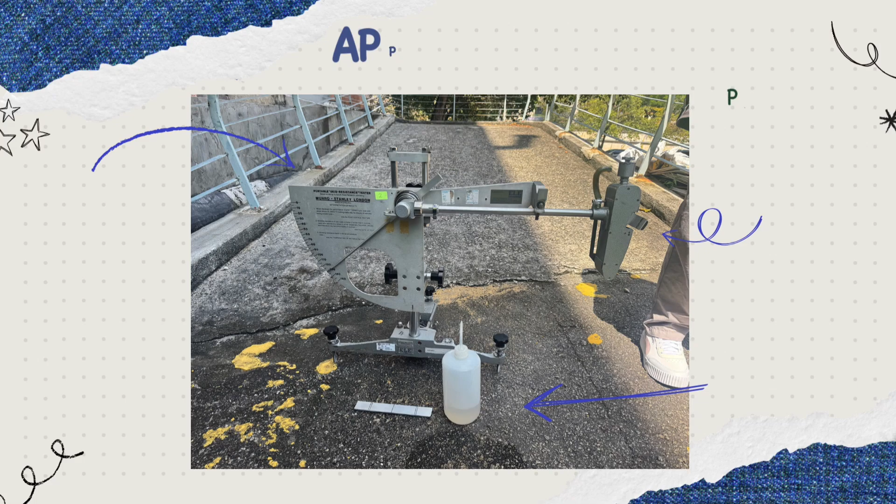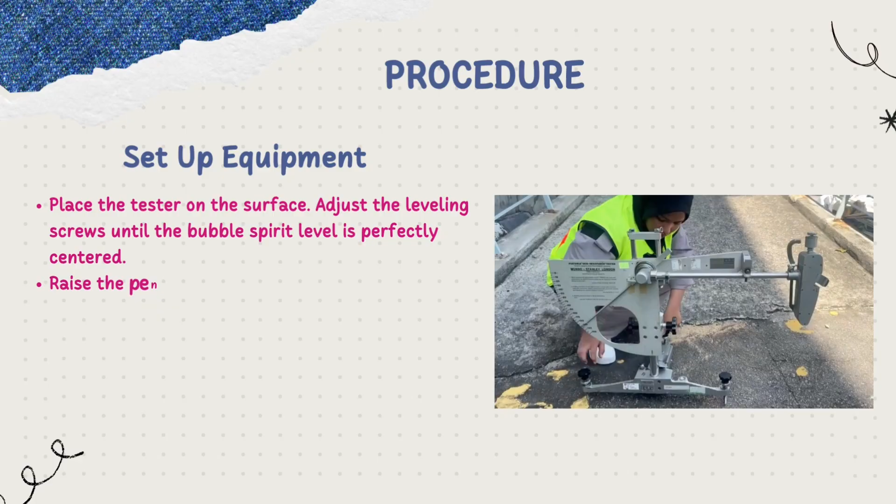Set up equipment. Place the tester on the surface. Adjust the leveling screw until the bubble spirit level is perfectly centered. Then raise the pendulum arm to the horizontal lock position.

Release the arm without it touching the ground. The pointer should swing to 0. If not, adjust the friction ring until it registers 0.

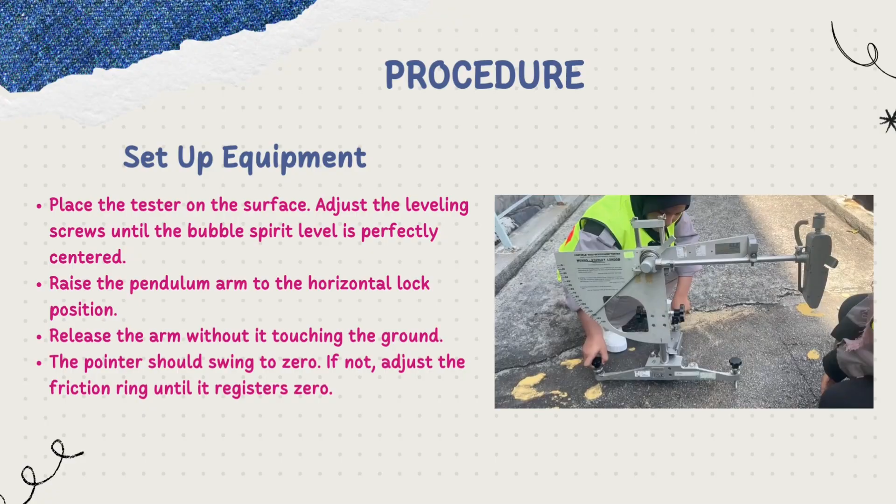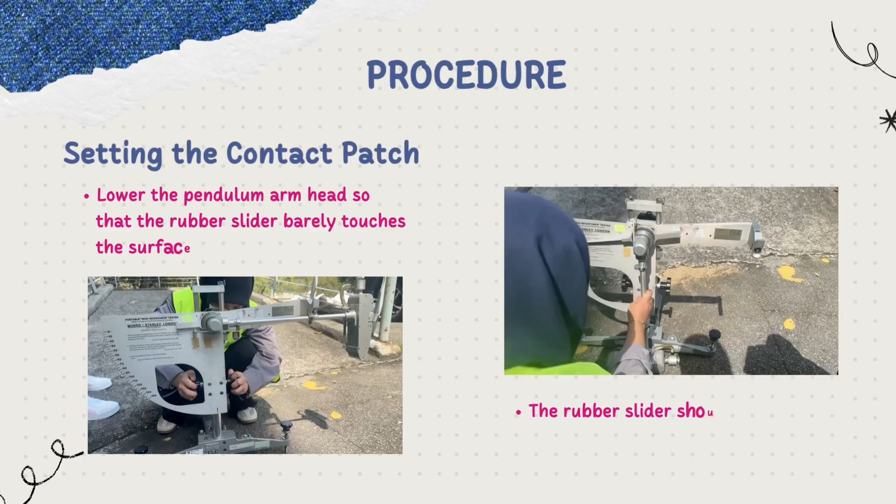Setting the contact patch. Lower the pendulum arm head so that the rubber slider barely touches the surface. The rubber slider should remain in contact with the surface.

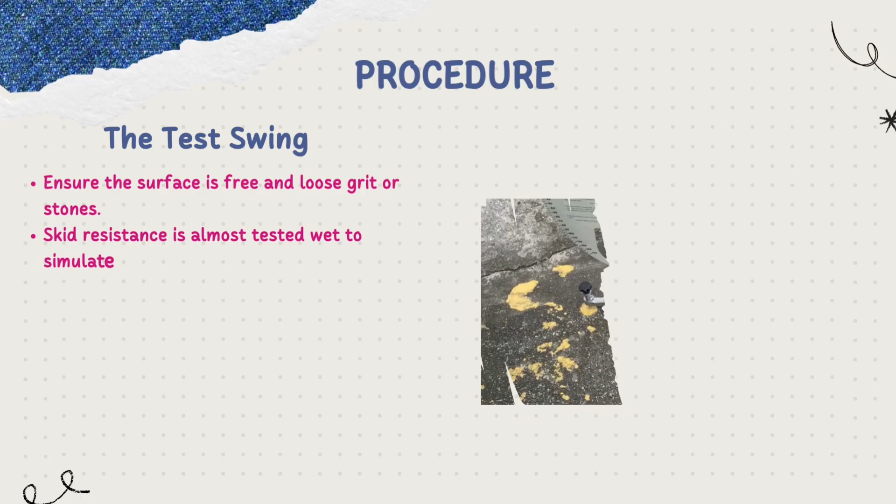The test swing. Ensure the surface is free of loose grit or stone. Skid resistance is always tested wet, to simulate the worst case scenario. Spray the contact area and the rubber slider with clean water.

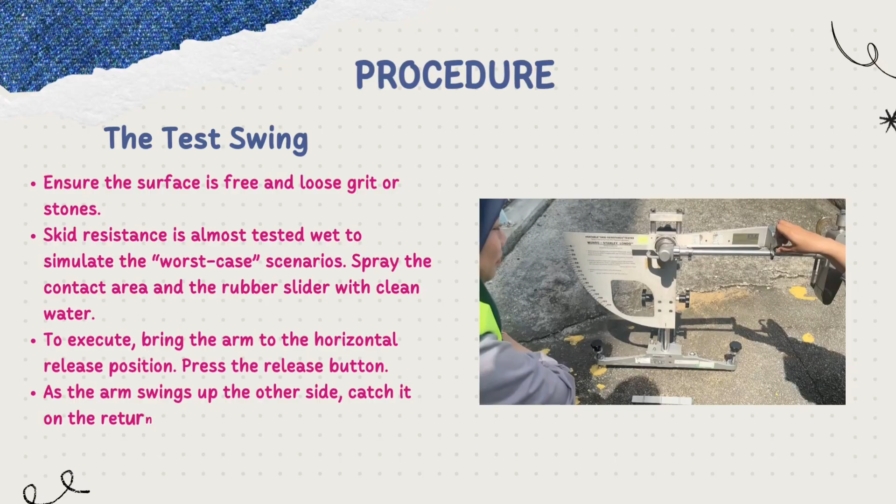To execute, bring the arm to the horizontal release position. Press the release button. As the arm swings up to the other side, catch it on the return to prevent it from striking the surface again.

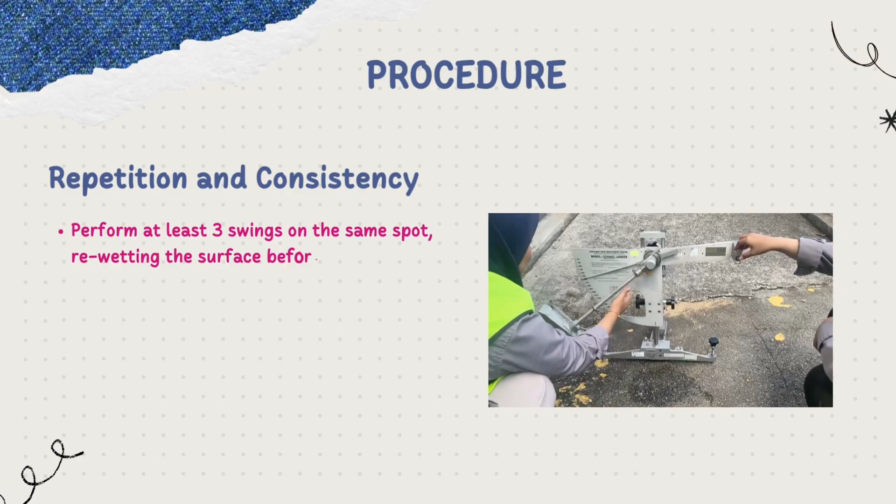Repetition and consistency. Perform at least 3 swings on the same spot, rewetting the surface before every single swing. The readings should be consistent. If they vary widely, check for debris or instrument leveling issues. Calculate the mean of the 3 readings.

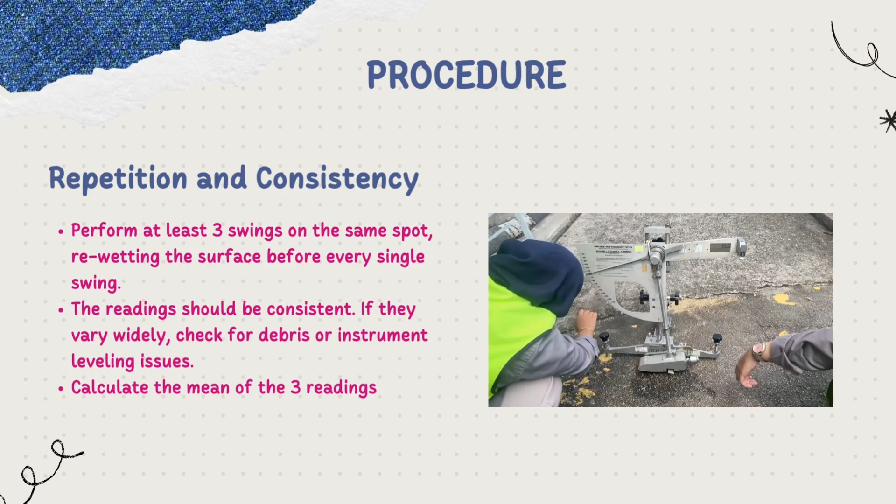For the discussion, a dry condition recorded a mean BPN of 50, which was used to calculate a skid number of 38 at 0 speed and 29.45 at 60 km per hour.

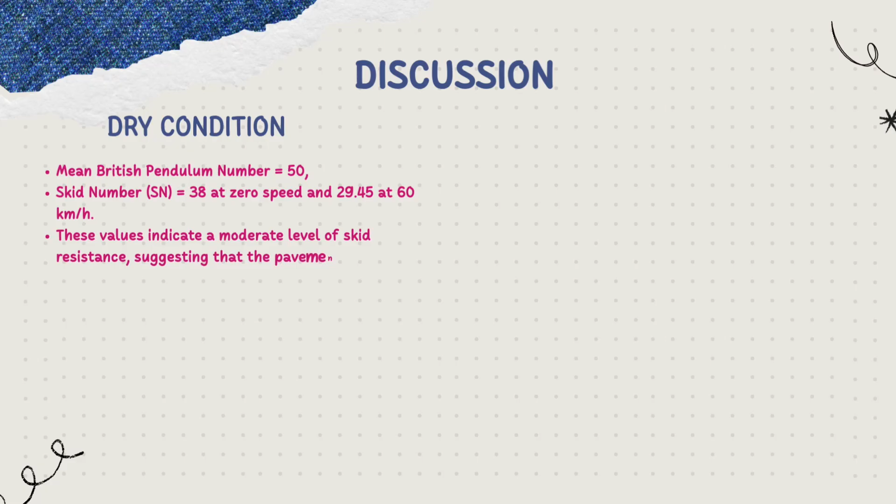These values indicate a moderate level of skid resistance, suggesting that the pavement provides adequate tire grip under dry conditions. However, the reduction in SN at higher speed demonstrates that skid resistance decreased as vehicle speed increased due to reduced tire pavement contact efficiency.

The wet condition recorded a higher mean BPN of 53.33, resulting in a skid number of 42.60 at 0 speed and 33 at 60 km per hour.

The higher BPN and SN values indicate better skid resistance compared to the dry condition, suggesting that the pavement surface maintains good friction even when wet.

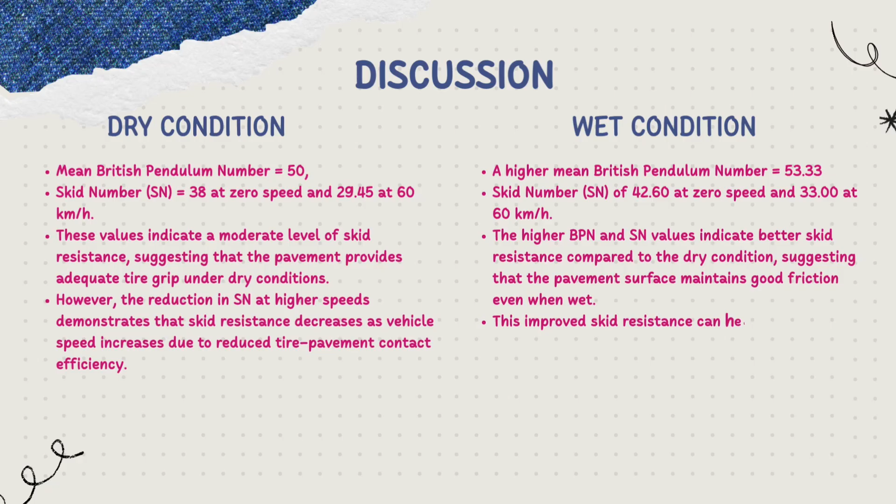This improved skid resistance can help reduce the risk of vehicle skidding and enhance driving safety, although the SN still decreases with increasing speed. The difference may be influenced by experimental factors such as surface condition, equipment variability, or limited sample size.

In practice, dry surfaces generally provide higher skid resistance than wet surfaces. Therefore, additional testing with more repetitions is recommended to improve the reliability of the result.

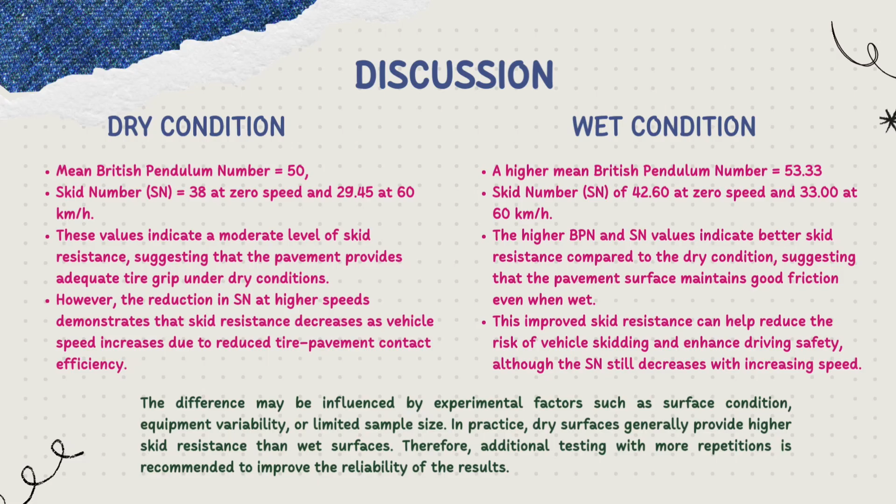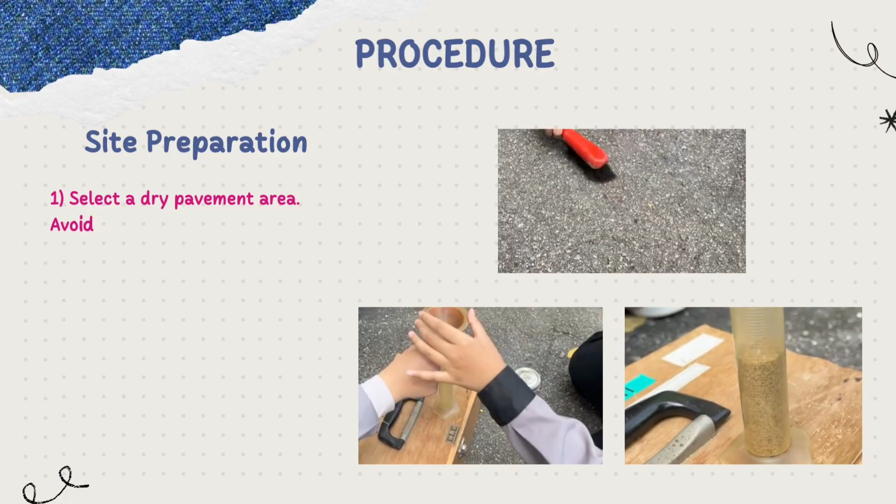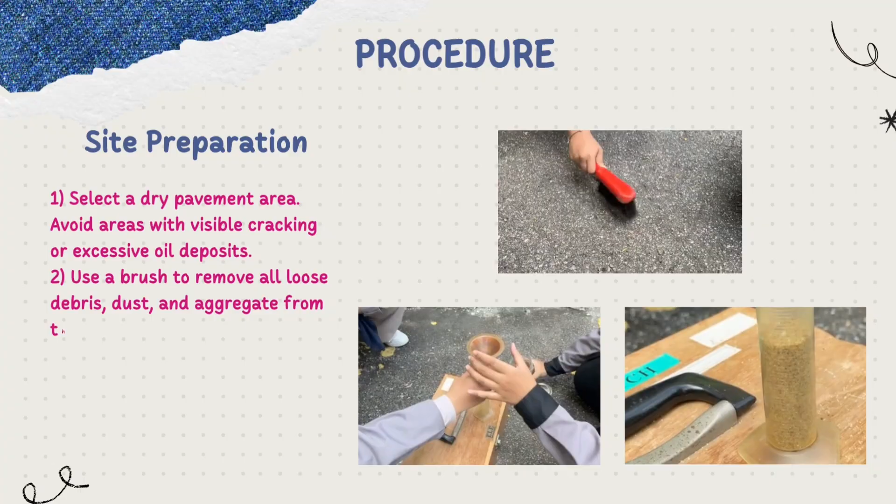Firstly, select a dry pavement area, avoiding areas with visible cracking. Then use a brush to remove all loose debris, dust, and aggregate from the test area. The void must be clear to receive the sand.

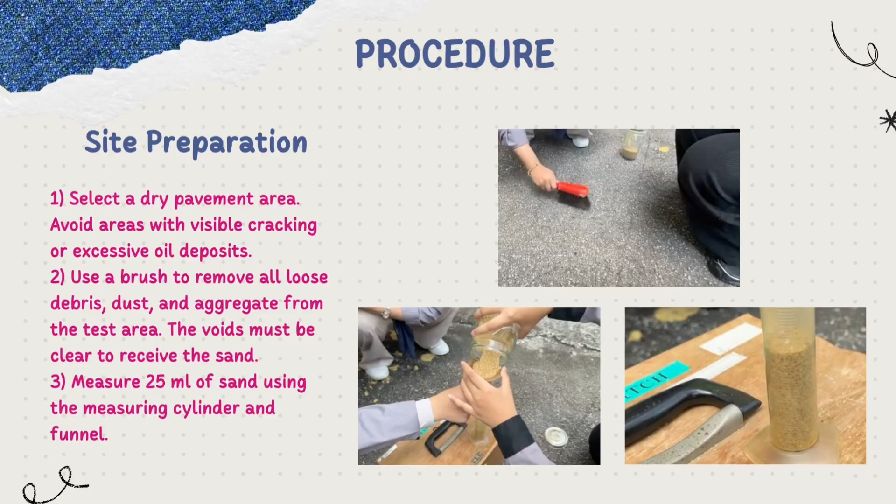Thirdly, measure 25 ml of sand using the measuring cylinder and pour the sand through the funnel. Next, pour the measured volume of sand into a small cone in the center of the clean test area.

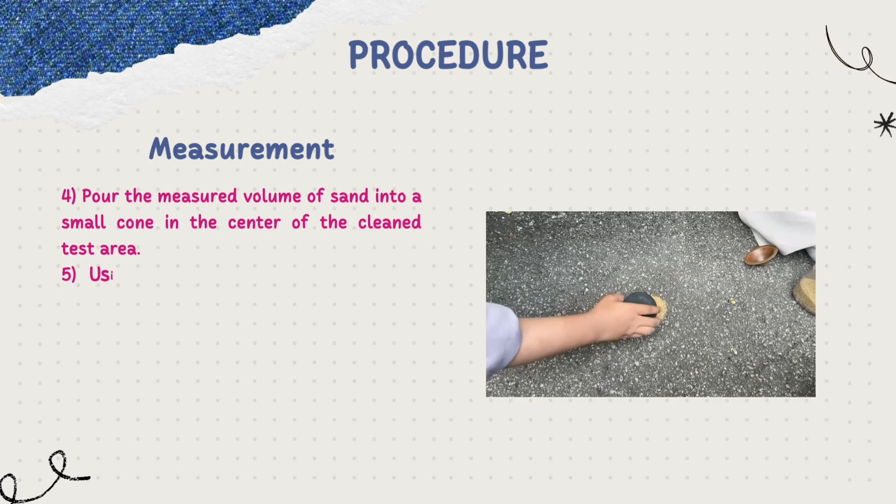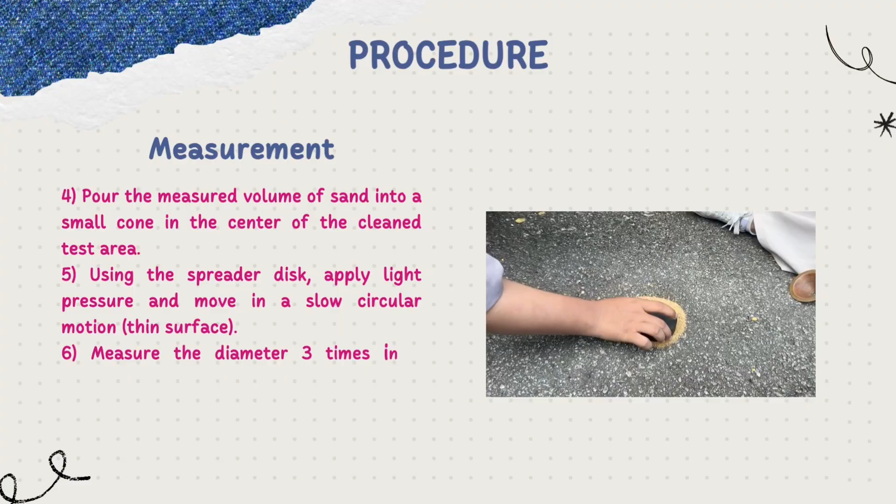Using the spreader disc, apply light pressure and move in a slow circular motion to form a thin surface layer. Then measure the diameter 3 times in a perpendicular line direction using a ruler. The surface is cleaned and the sand reclaimed.

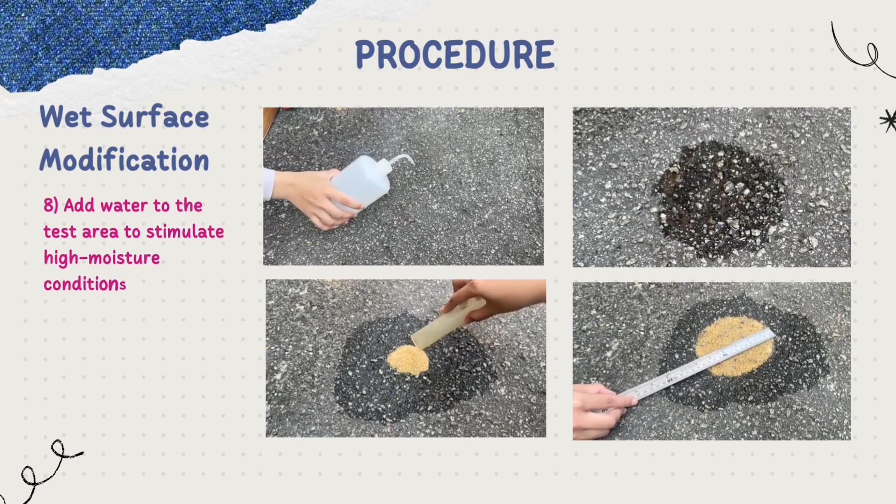After that, add water to the test area to simulate high moisture conditions. Then repeat steps 3 to 7 and analyze the recorded data.

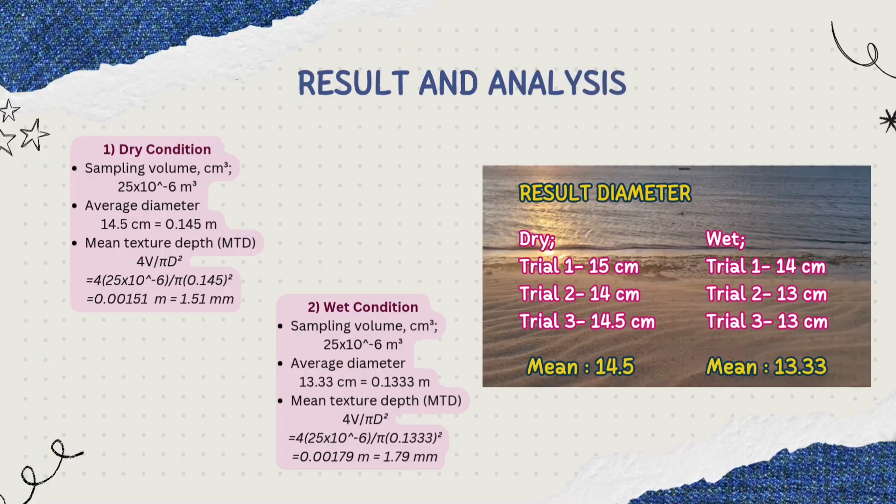Moving on to the discussion of our sand patch test results, we compared measurements taken on both a dry rough surface and a wet rough surface to evaluate the pavement's macro texture. First, let's look at the dry surface.

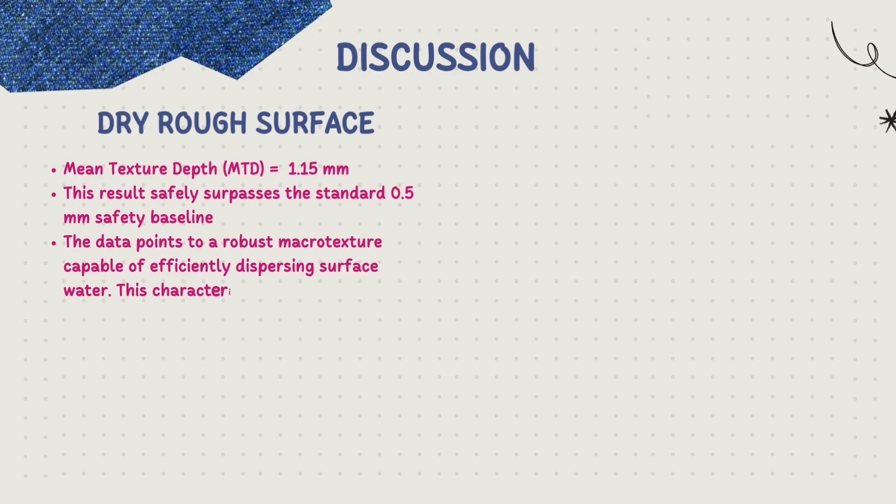We recorded a mean texture depth, or MTD, of 1.15 mm. This safely surpasses the standard safety baseline of 0.5 mm. What this data tells us is that the pavement has a robust macro texture.

This depth is highly capable of efficiently dispersing surface water, which is vital for lowering skidding and drifting risks and ensuring strong tire grip for passing vehicles.

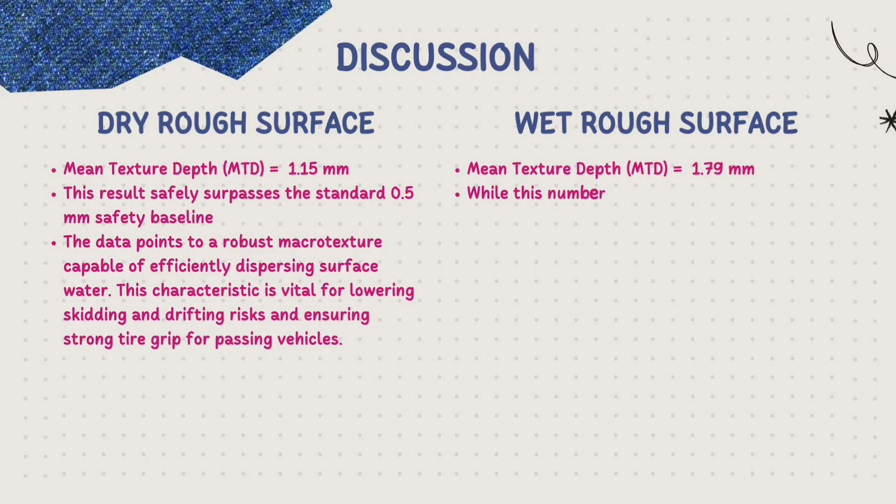Next, we examine the wet surface, which yields an MTD of 1.79 mm. While this number technically clears the 0.5 mm minimum, this result is actually invalid.

The presence of water on the surface forces the standard sand particles to bind together. Because of this clumping, the sand creates a much narrower spread, averaging only 13.33 cm in diameter, which results in an exaggerated and inaccurate MTD value.

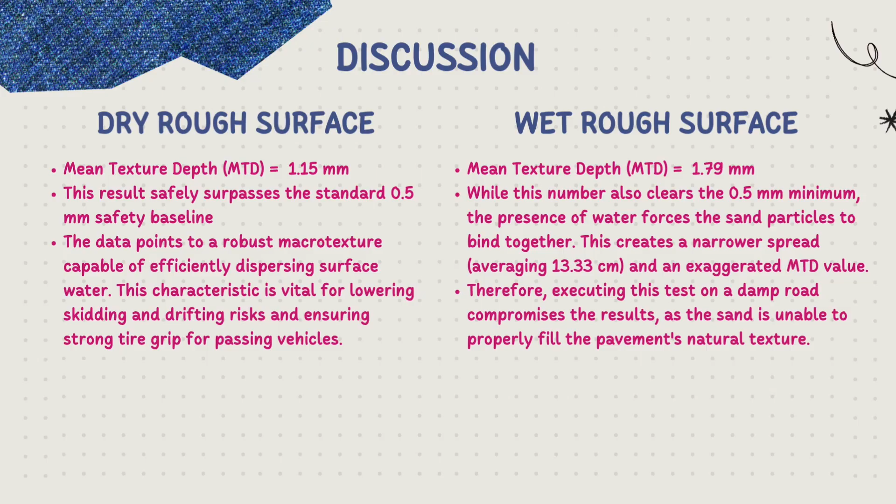Therefore, executing this test on a damp road compromises the results, as the sand is simply unable to properly fill the pavement's natural texture.

In summary, while both tests showed depth values above the minimum requirement, only the dry test offers a legitimate assessment of the road's friction capabilities.

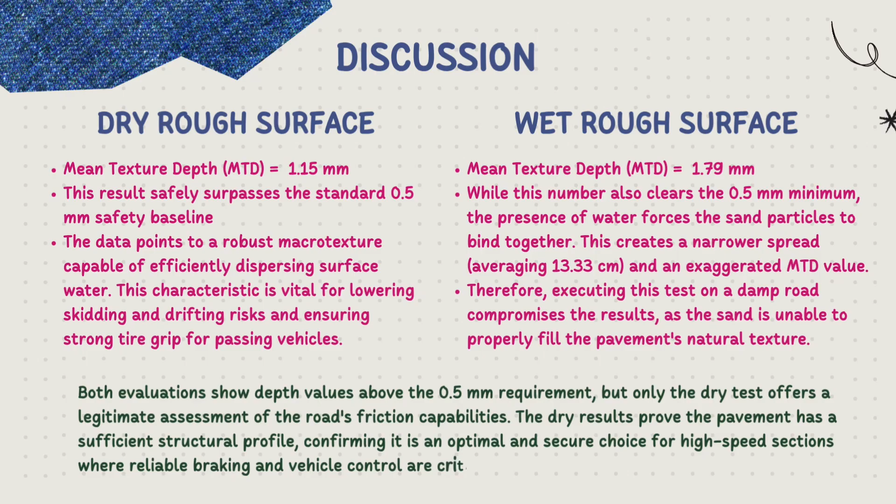Our valid dry result proved that the pavement has a sufficient structural profile. This confirms that it is an optimal, secure choice for high-speed sections where reliable braking and vehicle control are absolutely critical.

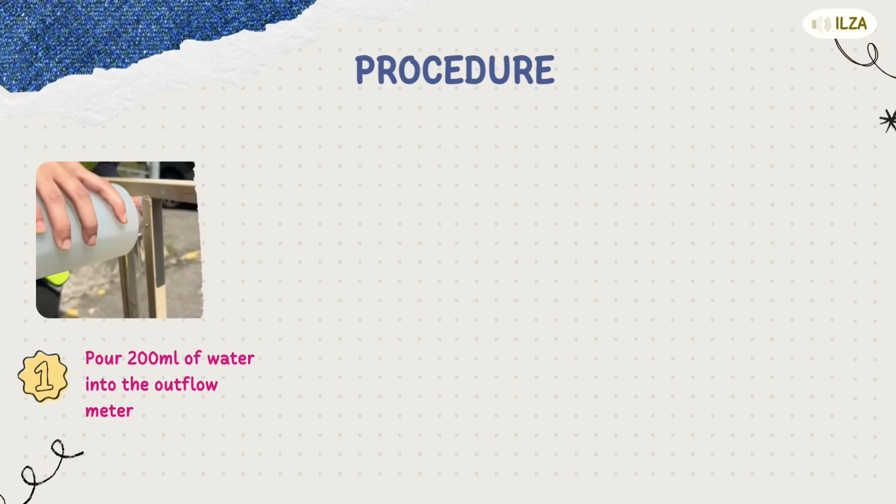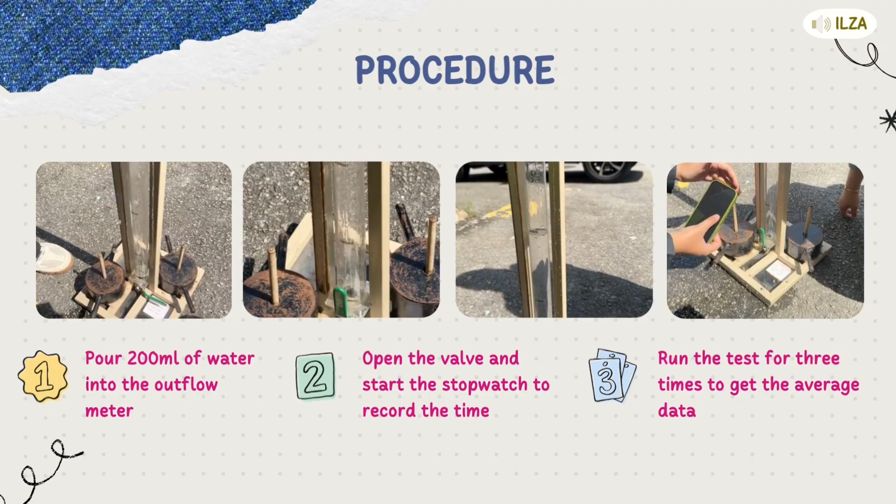First, we need to pour 200 ml of water into the outflow meter. Second, we will open the valve and start the stopwatch to record the time. Third, we have to run the test 3 times to get the average data.

Finally, let's discuss our findings. The experimental data demonstrate a high level of consistency, with outflow time recorded at 9.2 seconds, 9.3 seconds, and 9.1 seconds. This minimal variance implies that the sample has a uniform surface texture and that the testing procedure was highly repeatable.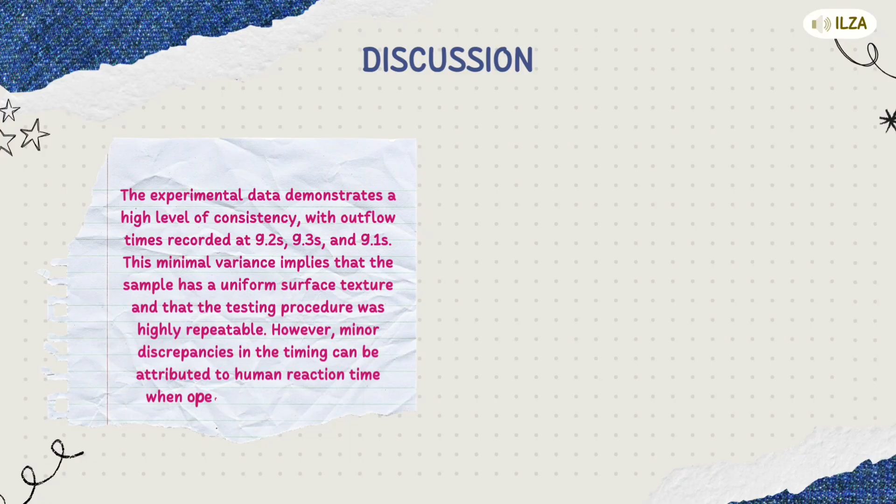However, minor discrepancies in the timing can be attributed to human reaction time when operating the stopwatch. Additionally, when conducting this test, factors such as lateral water leakage under the sealing ring or residual moisture trapped in the pavement from previous trials could marginally affect the exact flow time.

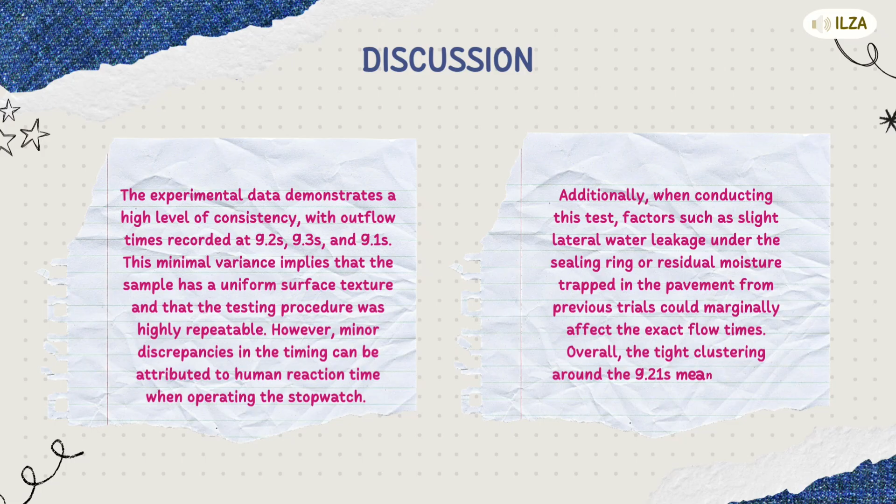Overall, the tight cluster around 9.21 seconds confirms the reliability of the results.

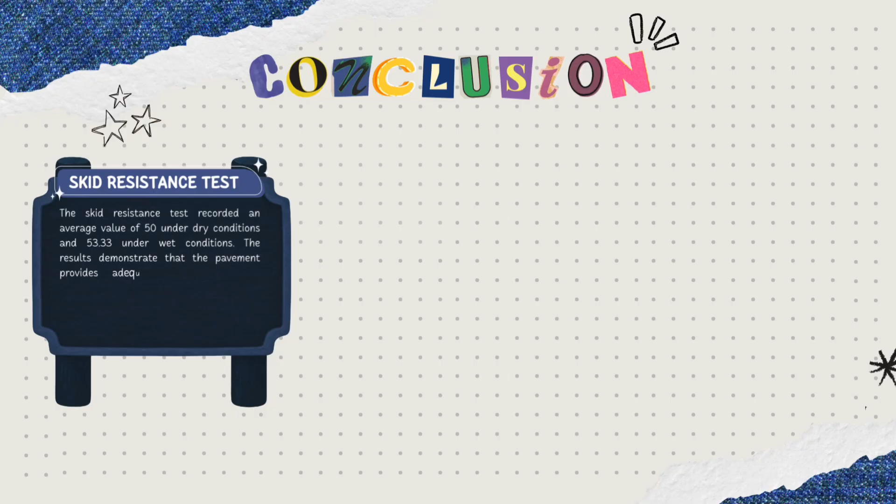In conclusion, the skid resistance test recorded an average value of 50 under dry conditions and 53.33 under wet conditions. The results demonstrate that the pavement provides adequate friction in both conditions, with the wet surface exhibiting slightly higher resistance, likely due to the interaction between the testing equipment and the moist surface texture.

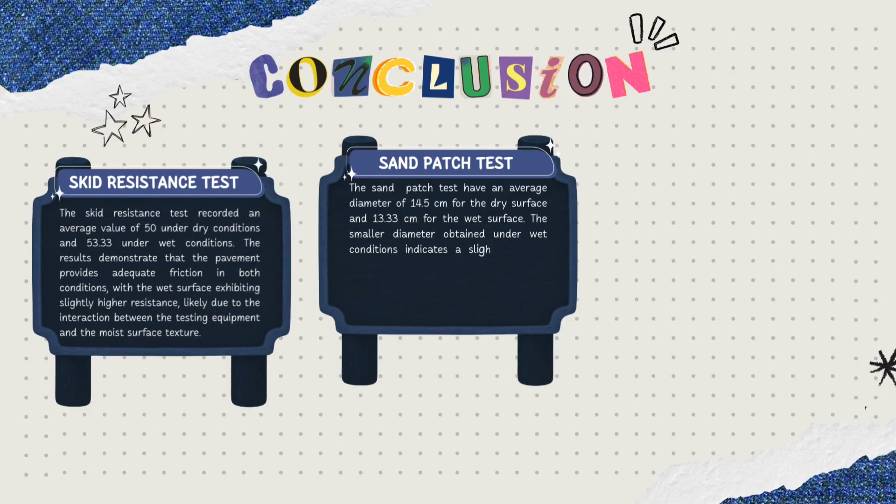Next, the sand patch test had an average diameter of 14.5 cm for the dry surface and 13.33 cm for the wet surface. The smaller diameter obtained under wet conditions indicates a slightly greater surface macro texture depth, which enhances water drainage and reduces the likelihood of water film formation on the pavement.

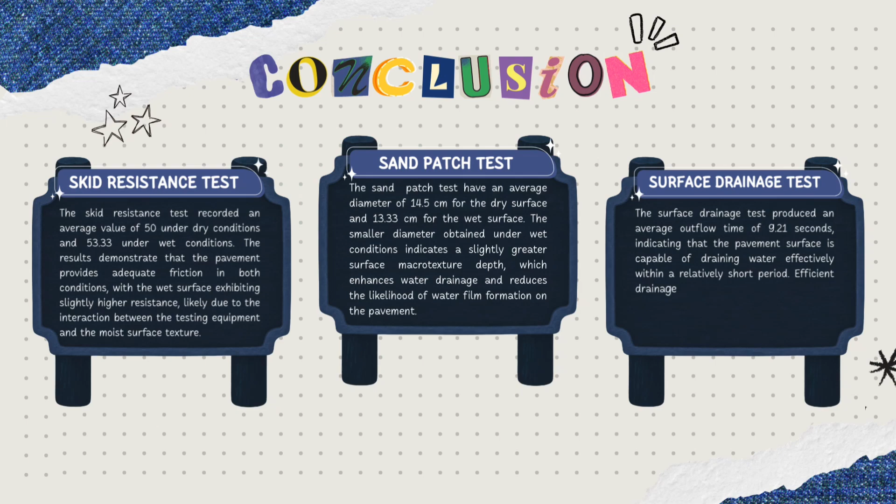The surface drainage test produced an average outflow time of 9.21 seconds, indicating that the pavement surface is capable of draining water effectively within a relatively short period. Effective drainage minimizes water accumulation, thereby lowering the risk of hydroplaning and contributing to safer driving conditions during rainfall.

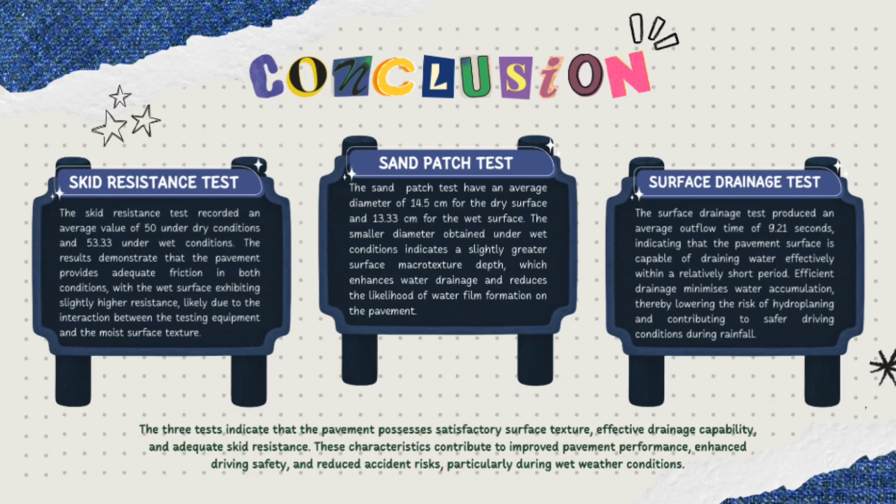The three tests indicate that the pavement possesses satisfactory surface texture, effective drainage capability, and adequate skid resistance. These characteristics contribute to improved pavement performance, enhanced driver safety, and reduced accident risks, particularly during wet weather conditions.